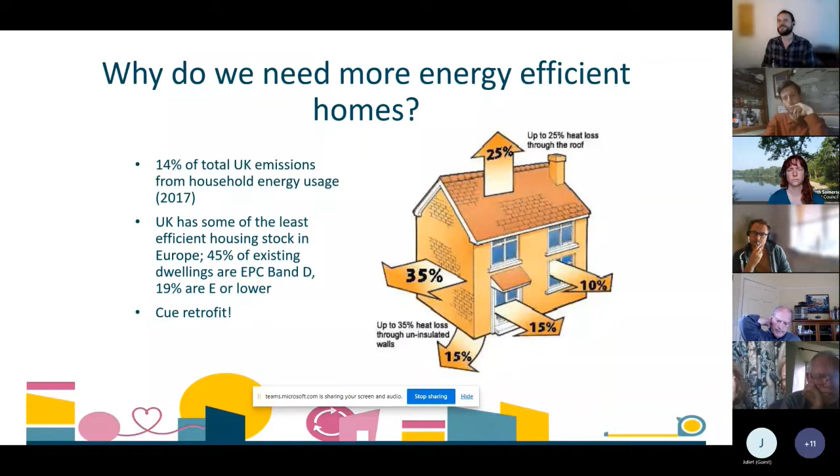Sure. So just breaking that one down there. As Matt said, retrofit means basically installing measures to existing dwellings to improve their performance thermally. It can mean different things, and an EPC score is a combination of things, because on the one hand it's the carbon, on the other hand it's the comfort, and on the third hand it's cost and the actual amount of energy that a property uses overall. So retrofit can be improving any or all of those things.

Ultimately, in this case, the goal is reducing greenhouse gas emissions. The term that's used a lot is a whole house approach. Proposed interventions are considered together with the building's context, so its age, the things around it, the weather, the elevation, lots of different factors. Any one thing you do to a property can affect it somewhere else.

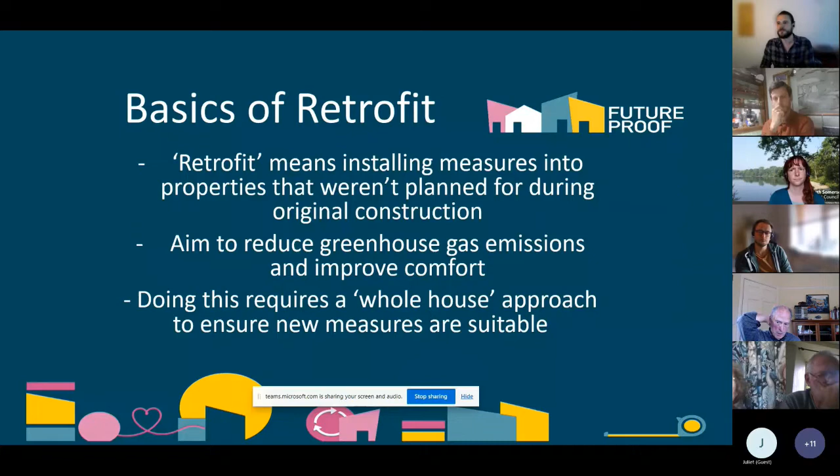So it's been called a joined up approach, not just focusing on individual measures and what effect they have on the property, but thinking about the whole dwelling in its context and the interaction between different measures you can do to a property. And if we go on again.

Really, what that looks like is it always starts with maintenance. We have an advice line at the Centre for Sustainable Energy, so anyone can call us up and ask us questions. Quite often I've heard people saying, oh, I have a damp problem, so I want to get this grant to insulate my walls to stop that. But that's not a good idea at all in many cases. It's complicated the way that insulation and damp interact with each other.

So you want to be retrofitting a healthy house, so that's your maintenance: make sure your rainwater goods, your guttering is intact, and your walls and all of that stuff. And then thinking about the best order in which to do things.

The example would be if you're thinking about external wall insulation, but you also need to replace your windows, let's say you have very poor single glazing. It wouldn't make sense to do the external wall insulation first, because there's going to be a lot of detailing around the windows. So when you come to replace your windows, you might be damaging that expensive measure you've already done. So thinking about the best way to do things.

The vast majority of building defects are caused by moisture. Buildings are essentially designed to deal with moisture, so we have to put lots of thought into that. It depends a lot on whether it's a traditional building, and we use terms like vapor open, vapor permeability, for traditional build materials such as stone and wood. Another way to think about it is they tend to breathe, so moisture can pass through them. Whereas modern buildings and modern insulation materials are impermeable, so we need to control moisture more through ventilation. So considering those factors.

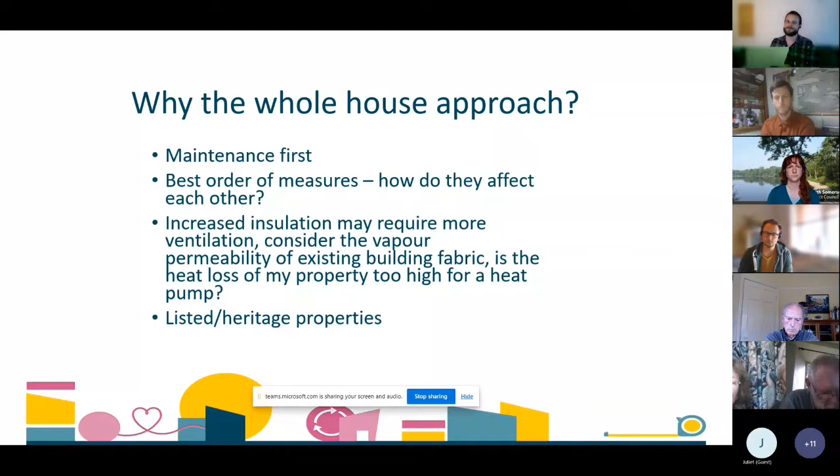And finally, on the slide, we've got the heritage issues. Your house might be in a conservation area or protected in some way, so you might have to get permission to do certain things. And further to that, we have what we call the hierarchy. What we have at the top there is energy conservation.

At CSE, like I said, we have an advice line. In Somerset, that's called Safe and Warm Somerset. Anyone can call our line, and we might say, have you defrosted your freezer? Do you boil too much water in the kettle? Do you close your curtains at night time? Have you balanced your TRVs on your radiators?

You know, have you done any draft proofing? All that kind of behavioral stuff that we can do to save energy around the home is always the first place to start. Because as efficient as a home is, it really depends on how people are using the property, which can make such a big difference to the amount of energy we use.

Then the energy efficiency is going to be really the insulation, which we call the fabric measures. So basically making the property more thermally efficient. So when you're heating it, which is obviously where most of our energy goes, on heating and hot water, less of that is escaping. So that's the fabric first approach, as it's often called.

I think there's a slogan there, which is basically, do I have it written down somewhere?

Anyway, yeah. And then finally, the renewable energy. So that would be things like heat pumps, which use heat in the environment, which is obviously a sustainable resource, and solar panels, which use the sun for energy, which is a sustainable resource. So that would be the last step. There would be generation, and then obviously Future-Proof as the project advises on these steps and what makes sense to do first.

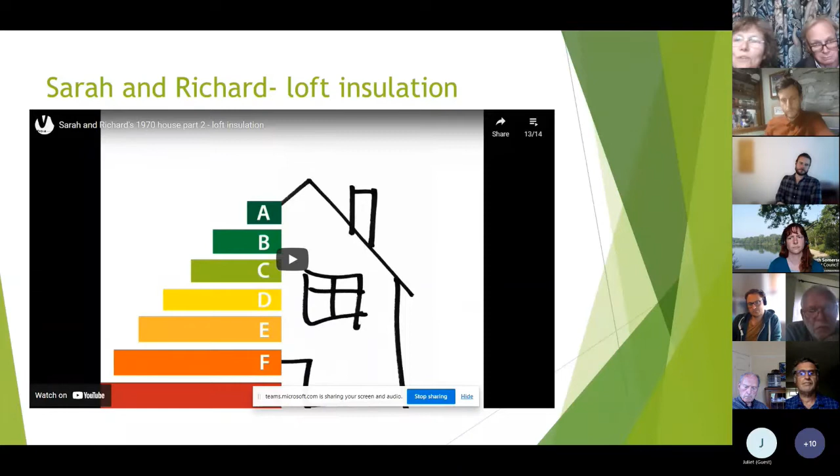I had a question. You mentioned doing various works to your previous property, and I wondered how similar that property was to your current property. It was actually very different. It was built in the 1830s with thick stone walls. It was a little Victorian cottage. And when we moved in there was no central heating at all. So we immediately put in an air source heat pump and also photovoltaic panels, because we'd saved some money going for a cheaper house. And then we gradually added really good double glazing as we went on and had the money for it. Thank you.

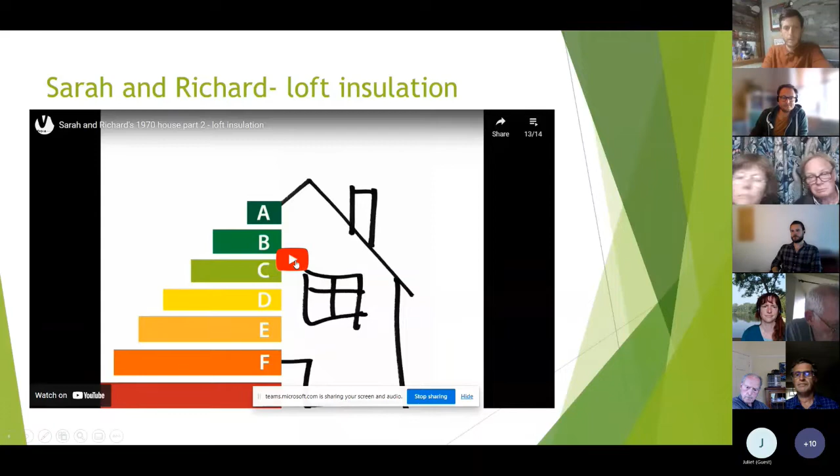Brilliant, thank you. Right, so next one, looking at insulation. Welcome to our loft. Not a statement I'd often thought I'd make. When we bought the house, it had loft insulation of the traditional kind, but we wanted somewhere where you could store stuff and get at it easily. So we wanted boards. So what we did was to take the old loft insulation out and have insulation board fitted, which was below the rafters level, so we could have boarding on top.

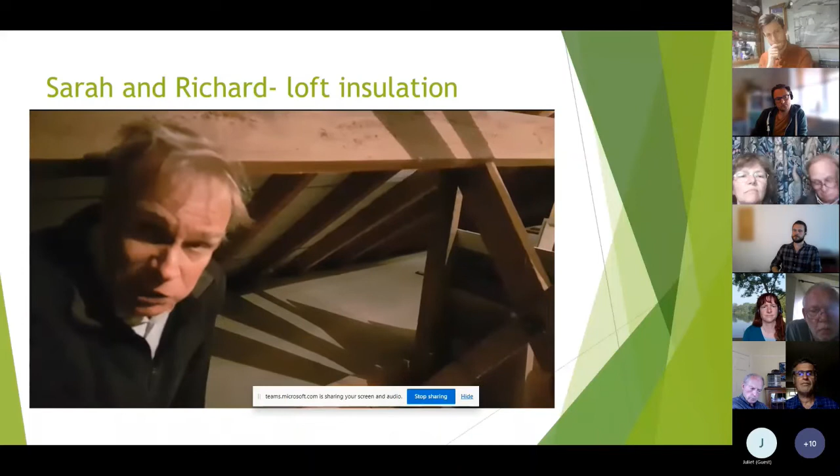There's just about one corner where you can see some of it, so I'll try and show you what it looks like. Here you can see just about what we did. There's the rafters running along the picture, and then on the left the boarding, and you can just see beneath it some of the insulation board. The insulation board we've got is 8 centimetres thick. The chipboard boarding on top 2 centimetres, which seems to work very well in terms of insulation.

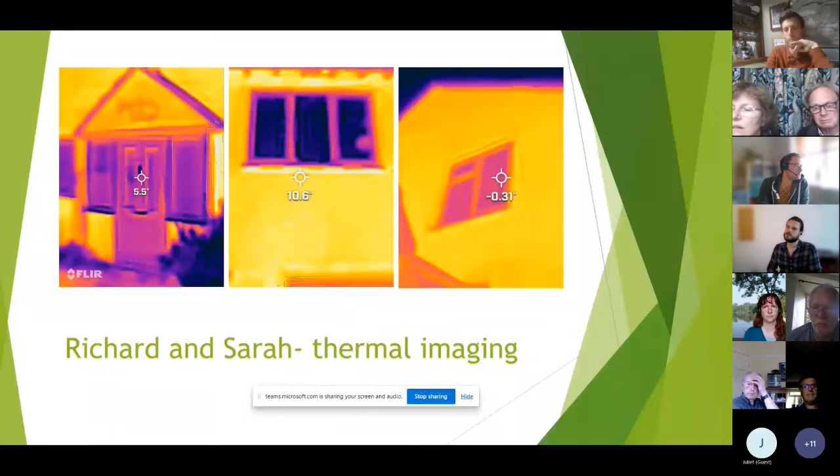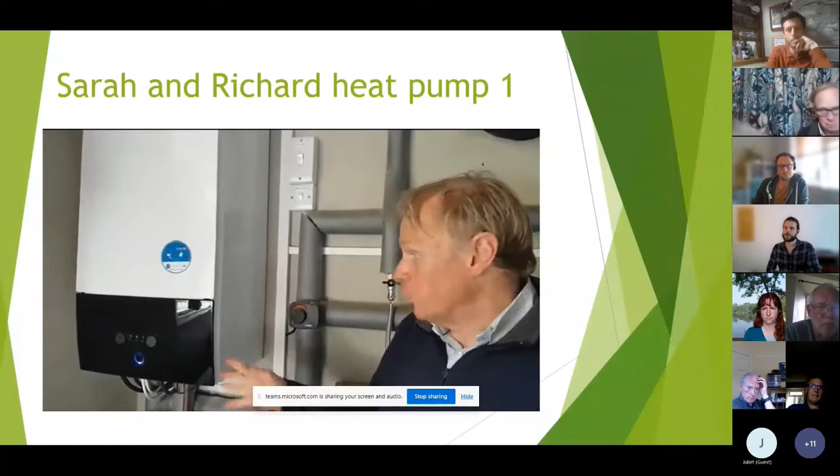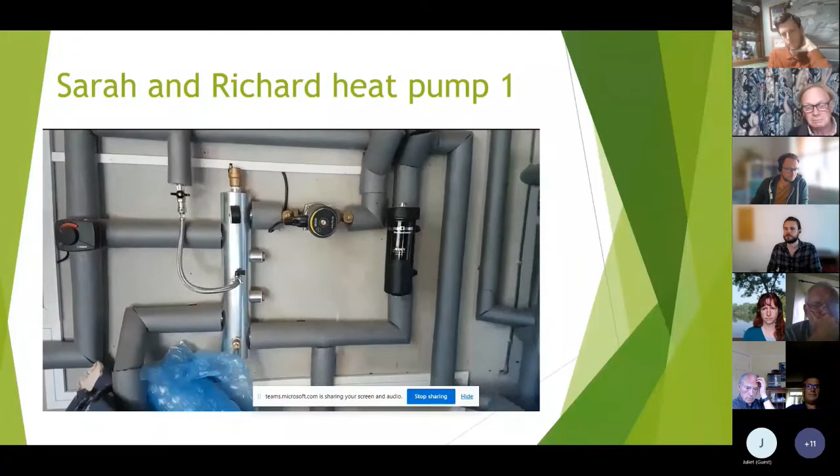Okay, so now the property is conserving the warmth, we're looking at generating that heat. This is the internal part of the heat pump, control panel below and clever electronics above, and then there's a certain amount of pipe work involved. We put it in the garage because it suited us and the heat pump's just outside, but they can be more compact than this.

We've also got the hot water tank in here. The house previously had a combi boiler, so there wasn't a water tank indoors, and rather than disrupt the house, we put it out here in the garage.

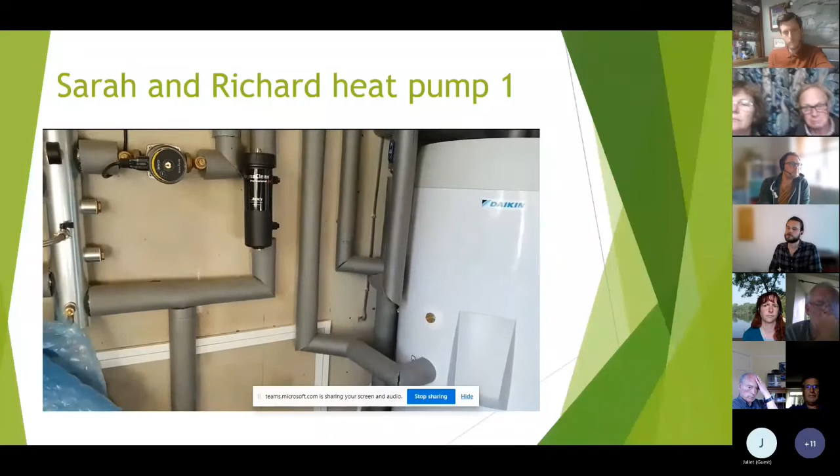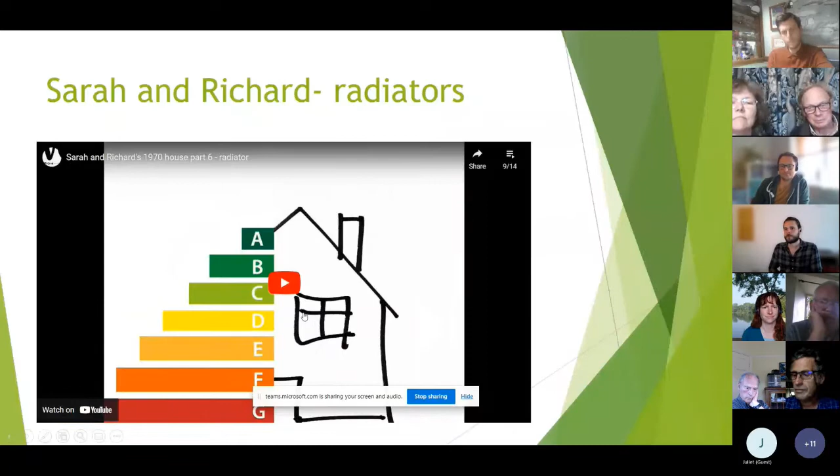We'd already replaced the old 1970s radiators in the house, and when we installed the heat pump, we decided we'd see if it works fine with those radiators, and it does. Our bills are partly low because we're quite happy to keep the house at a relatively low temperature constantly, day and night, and if needs be, we just put on a bit of extra clothing in the depths of winter. But when we've had guests and we've put the heating up, the existing radiators have coped absolutely fine.

So the questions I had: when you installed the heat pump, you didn't add any additional radiators or increase the size of them. I wondered if your contractors advised you whether you should have done or not. Yes, we discussed it with them.

Because of the way we use the house, you made the point earlier about how people use the house. We go on the person, not the property approach. So we keep the background level reasonably low, and they said, try it and see, rather than go to the expense and disruption of putting in larger radiators, use the existing ones, which are modern and pretty efficient, and come back to us if it didn't work. In our previous property, when we went from scratch, we did have larger radiators installed for the heat pump, but we've not found any problems at all using these ones. So if you have modern, reasonably effective radiators, you might well find you don't have to replace them.

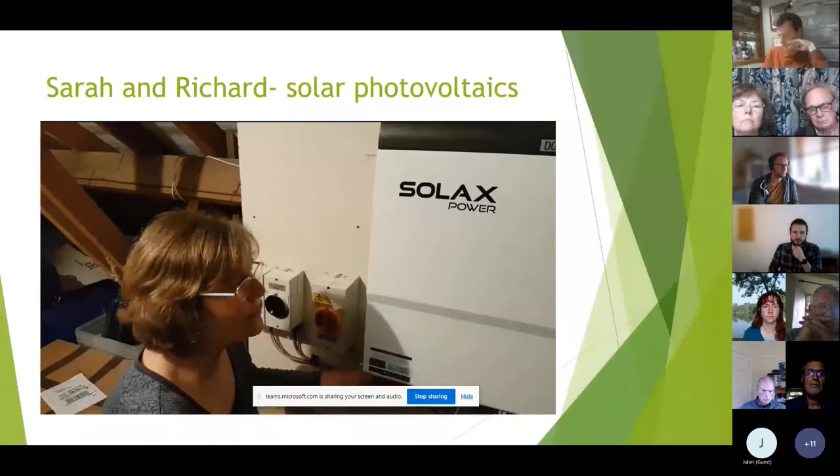So now we're up in the loft, as you can see, and this is our inverter that converts the direct current to alternating current ready for use. This is our battery down here, the batteries, and then there are more isolator switches here, and isolator strings, and we don't really know all about that. You can see it needs inspecting after 3 years, so perhaps we'll find out a bit more.

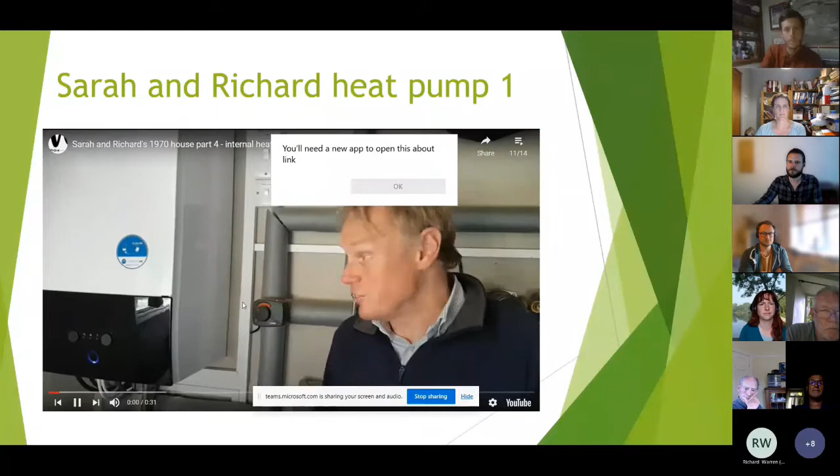Sorry, bear with me. Oh, I knew it was going to do this. This is the internal part of the heat pump, control panel below. Right. Sorry about that. Right.

So Juliet and Ben, also in South Somerset, we'll play your introduction video. Hi, I'm Juliet. I live here with my husband Ben and our 3-year-old daughter. We bought the property in 2014 and we renovated it in 2015. We wanted to take the environment into consideration as much as possible, and I'm going to show you a few of the environmental features that we fitted. You can see our 18 photovoltaic.

Juliet, do you have anything to add about your motivations for any of the works that you carried out? Primarily environmental reasons, but the added benefit of saving money and making the house more comfortable, same as the others, really. Thank you. Right, let's look at your installation.

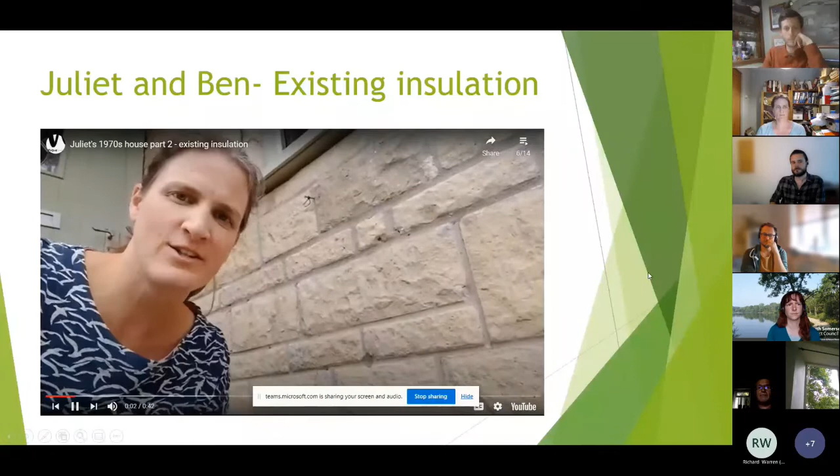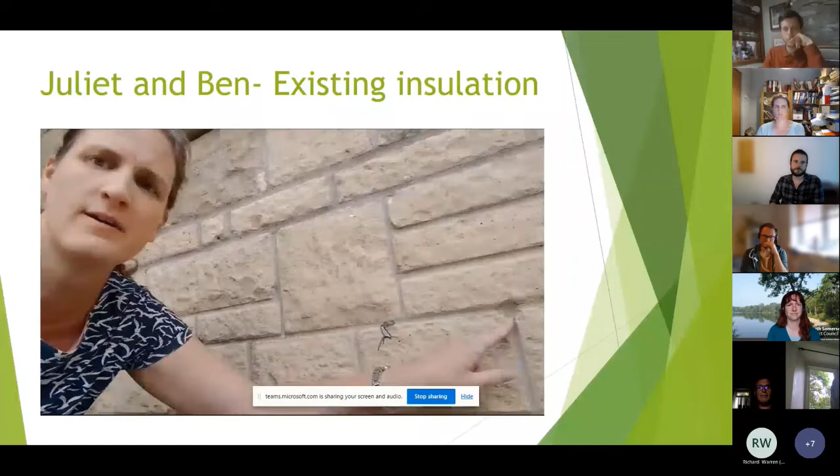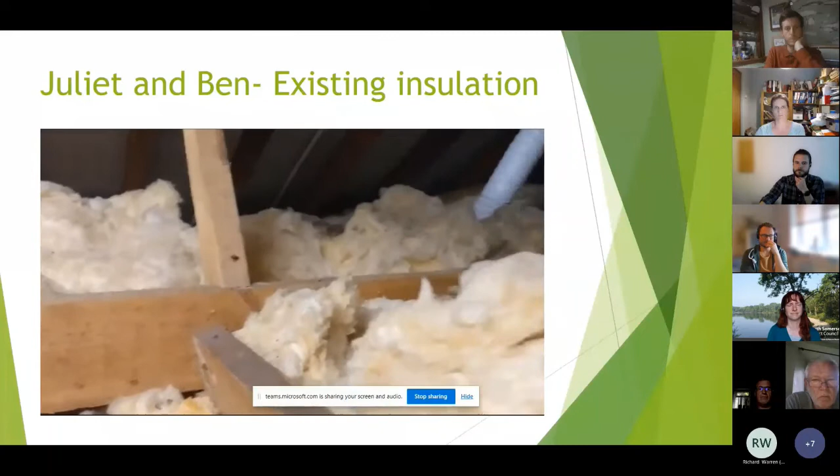When we moved in, cavity wall insulation had already been fitted. We can tell this from the holes in the mortar lines every few feet along. So there's one hole here and another one here. So that's how we knew it had already been fitted. There was also existing glass fibre insulation in the loft, although you can see it's a bit thicker in some areas than in others, and also it doesn't cover the joists, so this probably could be improved. And whilst I'm up here, I'll also show you the pumps for the solar hot water system.

Matthew, I don't know if you've got your mic switched on whilst you're playing those. It seems to be quite echoey, which it wasn't on the dummy run. Don't know why that might be. I'm not. I don't think, because I'm sharing my full screen with audio, I can take that off, unfortunately. Oh, okay. Hopefully everyone can hear all right. Yeah. Apologies if that is the case.

A question I had was about your cavity wall insulation, which obviously was already done in the property. You've not had any issues with it yourself? No, it's been perfectly fine. We haven't had any damp issues at all, which I know some people have had problems with damp caused by having cavity wall insulation fitted incorrectly, but ours is all good. Yeah. Cool. Thank you. And in terms of the loft insulation, is it something that you're looking at improving?

Yes, I'm not working at the moment, so we're a bit limited on budget right now. But once we start getting some money coming in again, then yeah, we're going to be looking at adding a bit more to the loft.